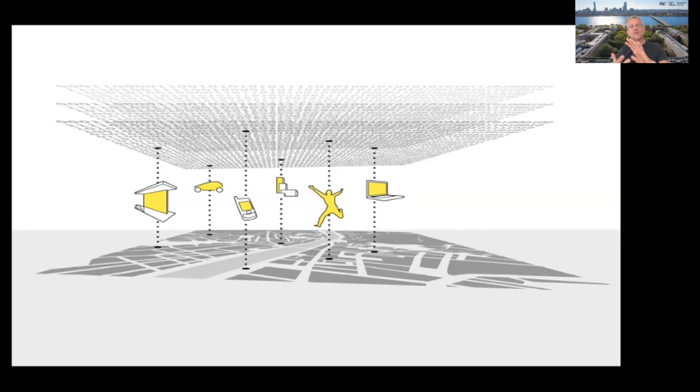One of the key components of this is data on one hand—data is what allows a better understanding of the city—and intelligence, especially artificial intelligence, on the other. There's no artificial intelligence unless you've got data. So the two are connected, increasingly providing a blending between the world of data, the world of digital, and the physical world. That's what we're passionate about. We do it first at MIT, at the Senseable City Lab in Cambridge, Massachusetts, and then globally, with our design office in New York, Turin, and London, and with some of the startups that came out of both.

So when you look at the relationship between the natural and the artificial world—and if you're interested in looking at this more philosophically, there's a beautiful book by Herbert Simon called The Sciences of the Artificial.

The artificial is about our cities, our buildings, about objects, the things we make. In the natural world, more or less, we all know what it is. We can actually go from the artificial to natural and vice versa. So let's start looking at how to go from the artificial to the natural, how we can start from the artificial world of a city and blend it more with the natural world, thanks again to sensors, intelligence, and data.

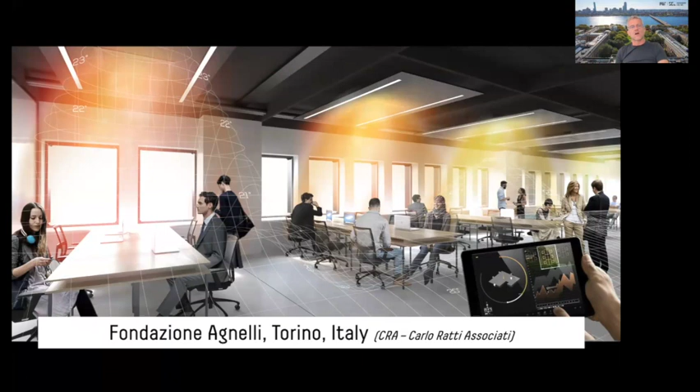This also applies to buildings. This is a building we designed in Italy, the headquarters of the Agnelli Foundation. The Agnelli family, the Agnelli Foundation, is behind one of the largest European conglomerates, spanning all the way from automotive to publishing. Here we did a building where, thanks again to data and sensors, the building responds dynamically to conditions inside. Heating, lighting, and cooling respond to the presence of people. If there are fewer people, the building shuts down, in quotes. Everybody can have their own preferences in order to look at their condition.

Another project I wanted to share is one we presented at the World Expo in Zaragoza, Spain. The World Expo is the big international exhibition. The expo in this case was dedicated to water; water was a common theme of the whole exhibition. We started thinking about creating an architecture made of water. So the first idea was to create this kind of living water wall, and every droplet is controlled digitally. You can create a wall that becomes like a responsive living wall. You approach it and it opens up to let you jump through, as you see there.

You can use it almost as a display, but made with physical material, with water. When we presented this to the expo and to the mayor of the city, he liked it very much, so he commissioned us to build a pavilion at the entrance of the World Expo.

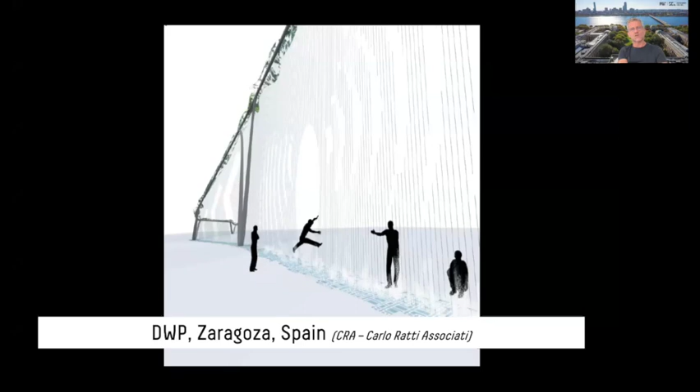The pavilion was called the Digital Water Pavilion. Let me reshare by sharing also sound, because I don't think the sound was shared before due to a small issue we had. So you can hear the sound as well, just a moment. I'm playing it again.

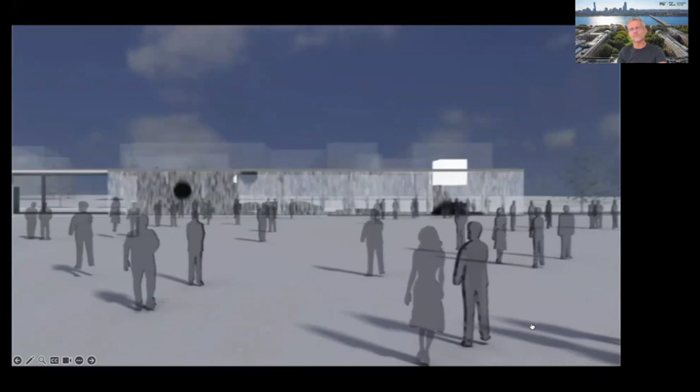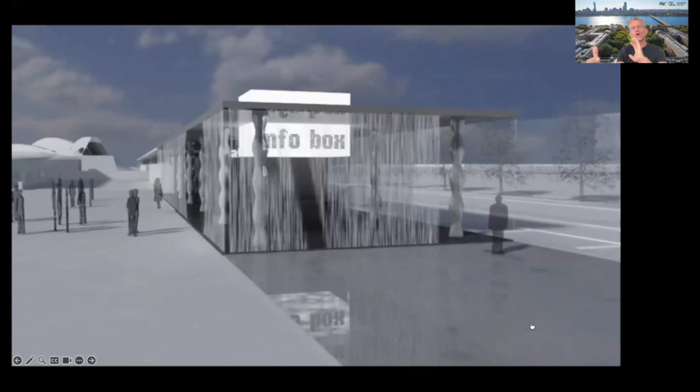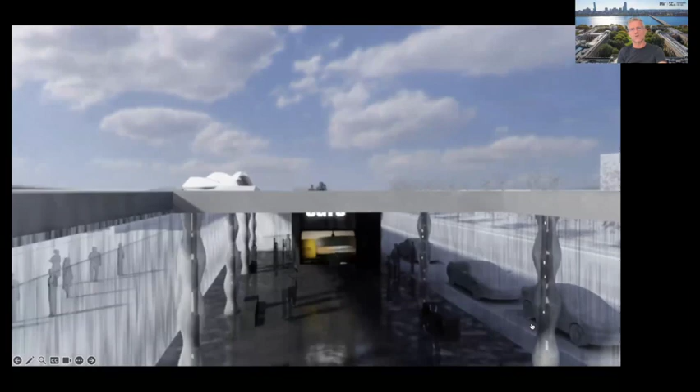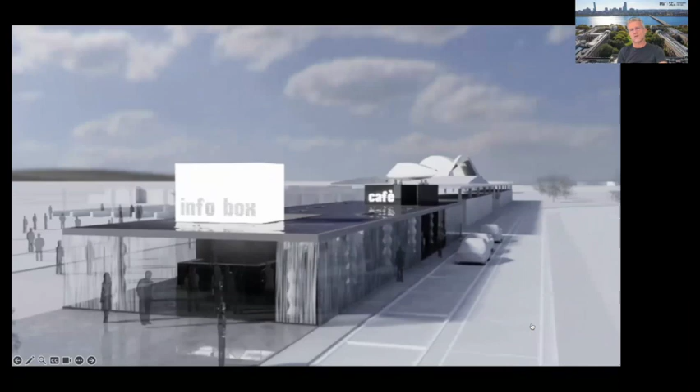This is the Digital Water Pavilion, and here you see the whole building is made of water. There are no doors or windows, so when you approach it, it opens up to let you in. You go inside, and all the walls expand and shrink based on how many people you have, or how you want to configure it. The roof is also covered with a thin layer of water. If you get too much wind, you can lower the roof and you may splash in, or at the end of the day, you can actually close the building and the whole architecture disappears.

Hopefully without other people there. There's sensors for that as well.

And I should tell you what happened one night when all of the sensors stopped working. When we build things that are in between the natural and the artificial, sometimes there are big surprises. One night all the sensors stopped working, and that night we were terrified because we didn't know what would happen. But actually that night was really great and fun. People started engaging with the building in a different way. It was no longer a building that would open up when you approach it, but a building where you had to engage like this.

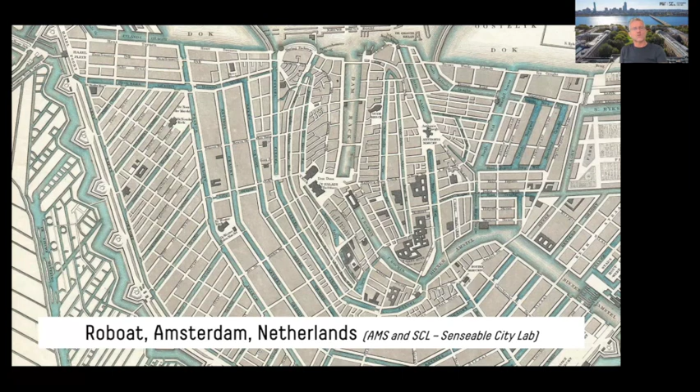But then when you look at Amsterdam, at an old map, what you see is a beautiful city where most of the city center is actually not roads, but canals. It's not asphalt, but water. So we started thinking: water, those canals, especially in the past, were the main way to move things around Amsterdam. So why not start from that and think not about autonomous or self-driving cars, but autonomous boats.

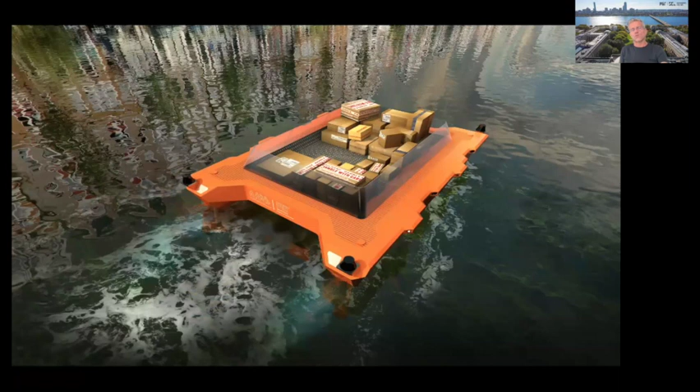We call them Roboat. This was the first sketch we did. The idea was that if we could use the Roboat to move things around, as happens today, to move people around, to monitor air quality and water quality, as a moving platform, but also as a kind of dynamic architecture. So if you needed a bridge, you could assemble these little things, call them floating pixels. They could come together and create a temporary bridge. If you need to connect two sides of a canal, or respond to an emergency, you can also have a floating platform.

So using this as a way to create a responsive, floating architecture for the city. Think about something like the Walking City by Archigram, but here done as a floating city, that continuously assembles and disassembles. And by the way, this is not something very new.

Incidentally, this was mentioned in a beautiful way by Paul Valéry, the French writer, who said: what I want from modern life, from modern technologies, is to lead a non-modern life, but in a different way.

I'll show you very briefly how we got to the Roboat. We started with a little model. This was a small model, 1 to 4 scale.

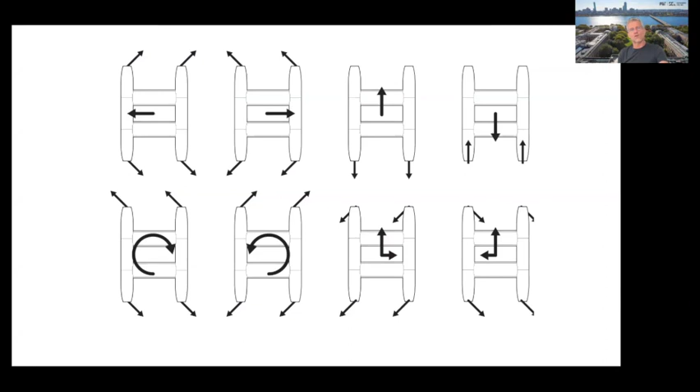We looked at different ways to control movement with different types of engines. Here you see this, we tested water jets. Here was again the little small one.

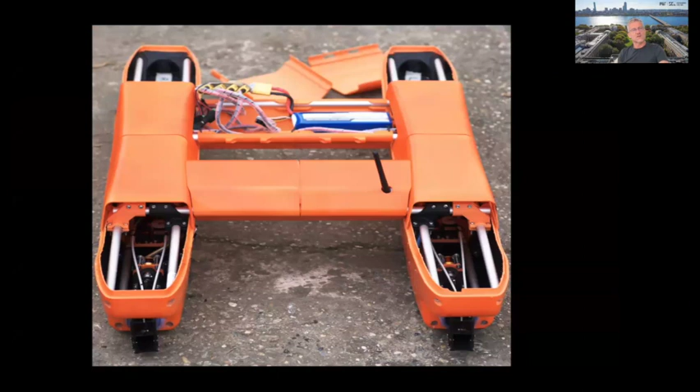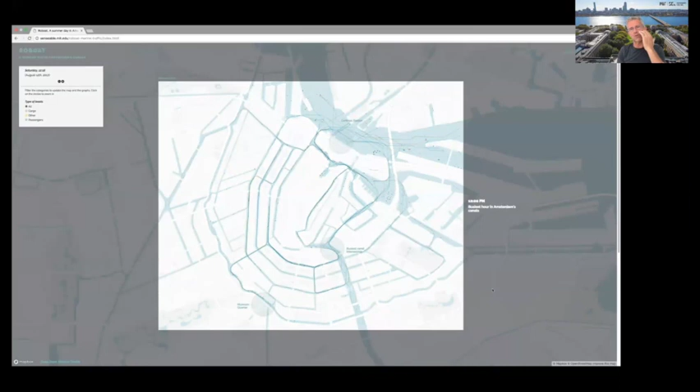Well, in order to turn this into something real, you need to do many things related to data and intelligence. One of the first things we had to do was map in real time all of the boats in the canals. This is information that normally on a street or road you find just by opening a Google map, but here you want to understand better what is going on with the traffic on the canals.

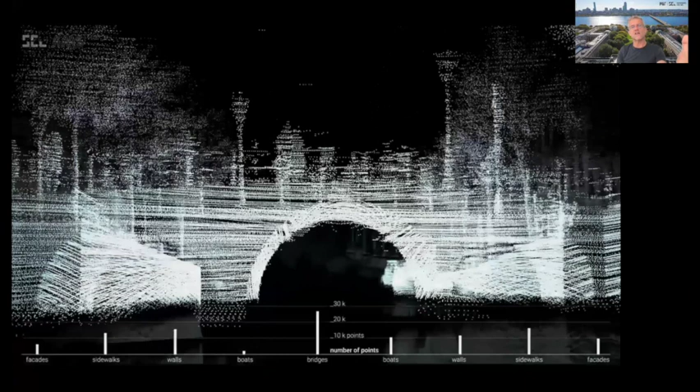So you want to map it, analyze it, and visualize it. And this is looking through the eyes of the robot, how it collects 300,000 data points every second, and how a robot sees the city. This is a kind of LiDAR sensor, so it's almost like a human eye, a silicon eye that does the same thing the human eye does, creating a three-dimensional view of the city in order to navigate it.

As congestion and emissions continue to rise while cities continue to grow, the existing infrastructure of many cities struggles to keep up. Roboats offer a solution by moving road traffic to the water, bringing passengers from A to B, or as an on-demand boat taking you anywhere you want. They can also help the city as a multi-purpose workboat.

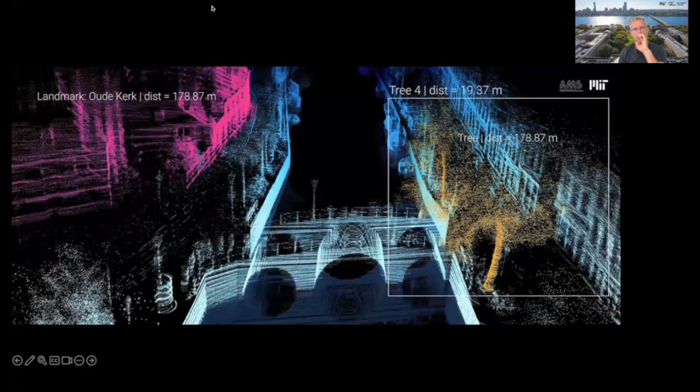The primary source of information comes from a LiDAR sensor, but Roboats are also equipped with cameras, GPS, and a digital compass. The Roboat's onboard computer combines and processes all of the data and runs the Roboat software so it can successfully complete its mission plan. After 5 years of development, testing and experimentation, we have now successfully enabled autonomy on the full-scale prototypes. Roboat is ready for the next step. Join us and let's unlock the potential of urban waterways together.

So as I said, this was what we've seen so far, starting from the artificial world, the world of objects, buildings, and cities, and trying to make it work in a living, responsive way, similar to the natural world, through sensors, intelligence, and so on.

But as I was saying in the beginning, there's also another way to look at this, going the other way around, not from the artificial to the natural, but from the natural to the artificial, so I can use nature itself as an integral part of what we are building. And by the way, this is nothing new.

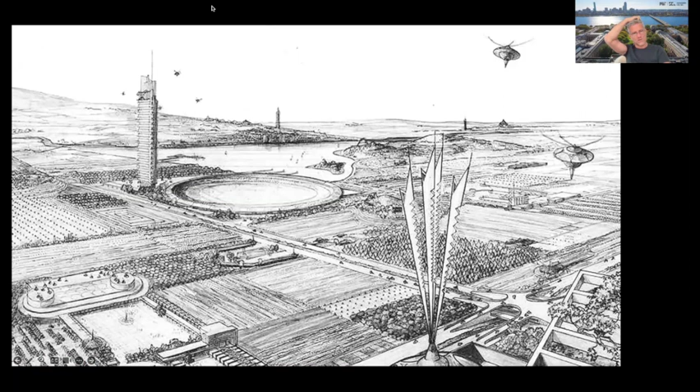If you look at this, many of you know what this is: Broadacre City, designed by Frank Lloyd Wright in the 20th century. You see again that this thinking about integrating nature with the city was a key part of the sketch. At the same time, we all know that this nice utopic vision actually led to something different.

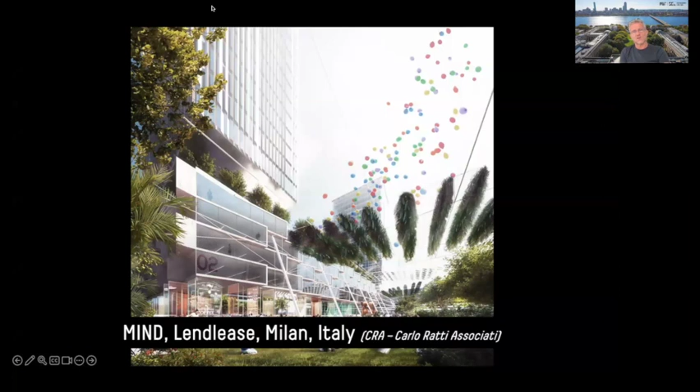Again, you bring back nature to a place that traditionally had very little of it—it was really just mostly made of stones. This is one of the biggest projects in Milan in terms of redevelopment. It's called Milan Innovation District, where nature again becomes a key part of the former World Expo site from 2015. We won the master plan with Lendlease, and it becomes this kind of long linear park that ties together all the development.

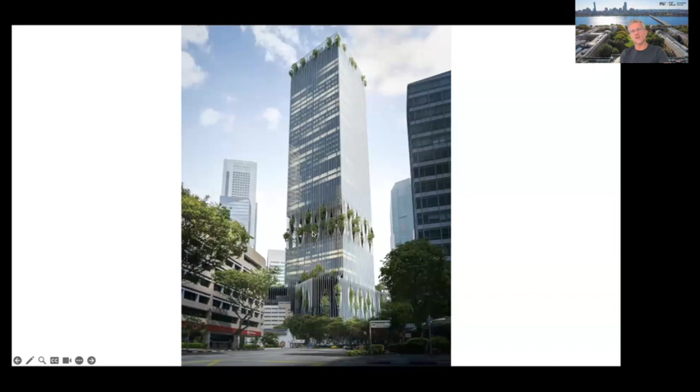This is a project we just finished very recently in Singapore. It's been winning quite a few prizes. It's one of the tallest buildings in Singapore, called CapitaSpring. The 'spring' in the name is actually the green element in the middle, like a beautiful suspended tropical forest overlooking the city, where people can go, meet, work, and enjoy free space. It's about meeting with other people, and people meeting with nature, as you see here.

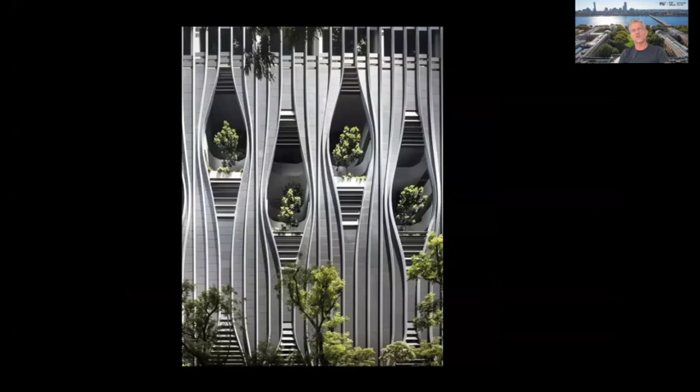And here you see the building as it is today, with the trees growing very, very fast, and the facade opening up to let nature take over.

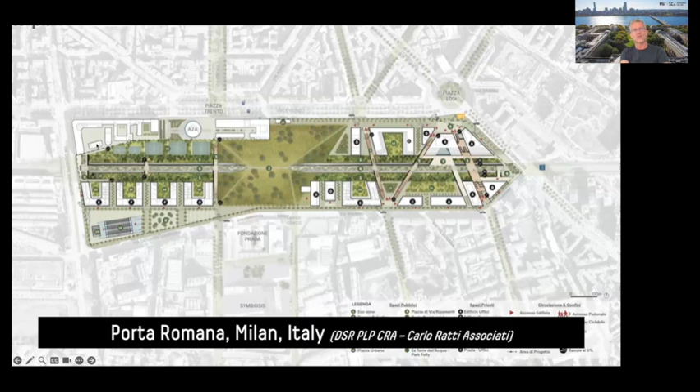Or this one, another project in Milan. It's a recent competition we won together with PLP Architects from the UK and DSR—Diller, Scofidio and Renfro. Liz Diller was involved in this project. Liz, as you might know, is one of the key people behind the High Line in New York, that suspended park that changed the city over the past 20 years. What you see here is a similar approach, where nature reconnects what was an old rail yard that cut the city into two parts. We reconnected them, both with a park running north to south, but also east to west, with this kind of long suspended park that ties and connects the city.

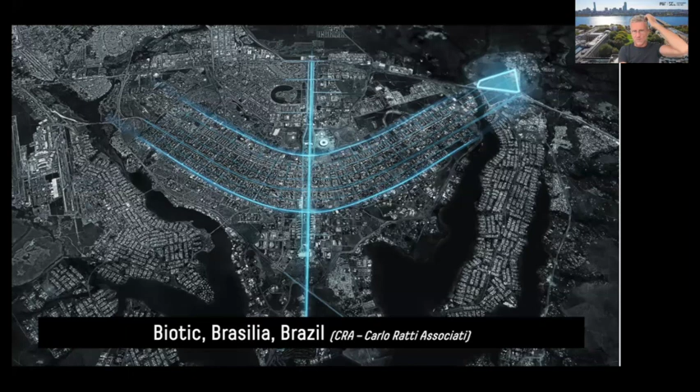This was one of the first major extensions of the original master plan. We took the same structure of the original master plan, but the master plan at the beginning was planned in a modernist way, mostly around the automobile and monofunctional districts. We tried to use the same geometry but break it up, to try to have something planned more around pedestrians, about humans, and about nature. So you see some of the new places that follow the same proportions, but actually create a very different type of environment in the middle of Brasilia.

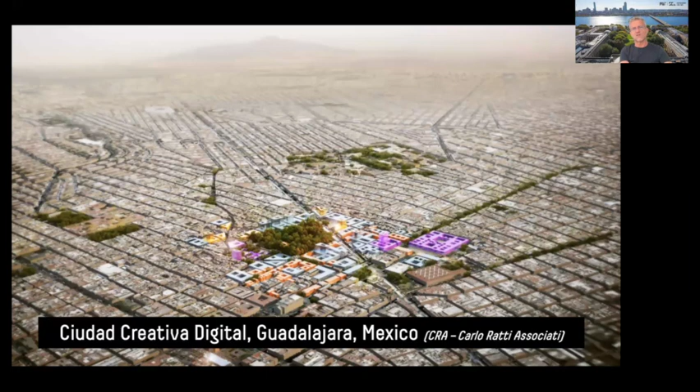Guadalajara is called the Mexican Silicon Valley, and a lot of this is at the core of the thinking, as you're seeing here. So I want to start wrapping up because we only have 5 or 10 minutes left. But basically, we looked at how to go from the natural to the artificial to the natural.

But the reality is that today, unfortunately, these two worlds are very different. On the one hand, you've got people working in what they call smart city, thinking about how to go from the artificial to the natural, but it means sensors, intelligence. That's one world. And then you've got people working with nature—two different communities in design that don't intersect much.

I would argue that actually we're doing the same thing. It's about this kind of blending, which is very necessary today. We need to start to work with nature, not against nature, and so we need to blend more and more by combining.

As I was saying, I showed you the projects so far in a simplified way, going left to right or right to left. But the reality is most projects combine both aspects, and I wanted to share with you one project where we combine both.

It's one of the largest urban decarbonization projects in the world today. It's called the Helsinki Energy Challenge, a challenge that the city of Helsinki launched 2.5 years ago.